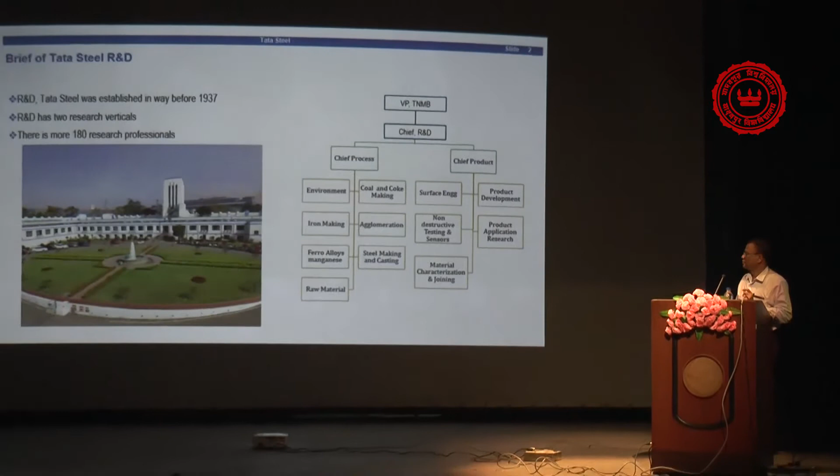R&D Tata Steel was established in 1937. Right now we have 180 research professionals, and it has two verticals in terms of process and product. Both verticals report to the R&D chief, who reports to the Vice President of Technology and New Materials Business. In the process vertical there are research groups for coal and coke, agglomeration, steel making, iron making, ferroalloys and raw materials.

Another research group is environment and energy, which I head myself. In the product vertical, there is surface engineering, which covers coatings, corrosion, finished product development, non-destructive product applications and material characterization. These are the R&D verticals.

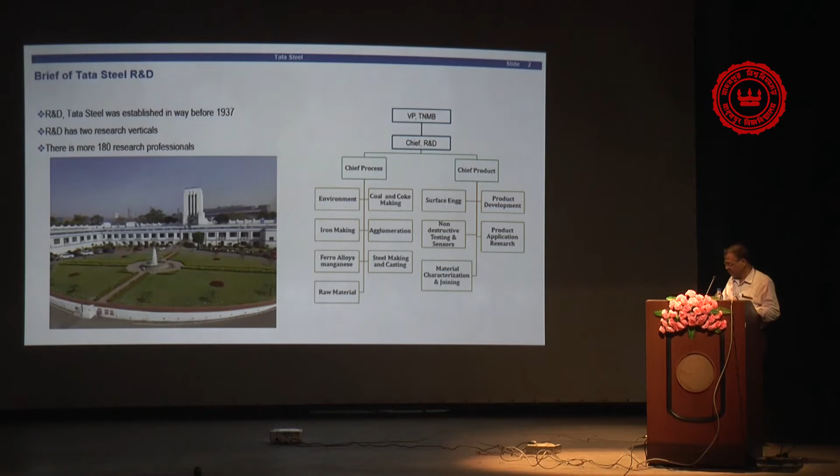Now, for any industry, sustainability completely depends on a concept called the circular economy. This circular economy is definitely applicable to the steel industry, because steel industry is one of the most energy intensive industries. It requires around 7 to 9 gigacalorie per ton of crude steel in terms of energy.

In terms of water consumption, it may be 3.5 to 4 meter cube per crude ton of steel. Another factor is carbon dioxide, which is almost 1.9 to 2 ton per ton of crude steel production. So carbon dioxide is also a major part, around 9 to 10 percent of global carbon dioxide emitted comes from the steel industry.

Now, this circular economy concerns the utilization of raw materials. Steel industry should reduce the use of raw materials as one source of improvement.

Second is, once you reduce it, either reuse it in the form of steel or for a similar purpose without significantly altering its physical properties. Suppose you are not able to reuse it, then remanufacturing -- another term called remanufacturing -- so you can use the material in different forms.

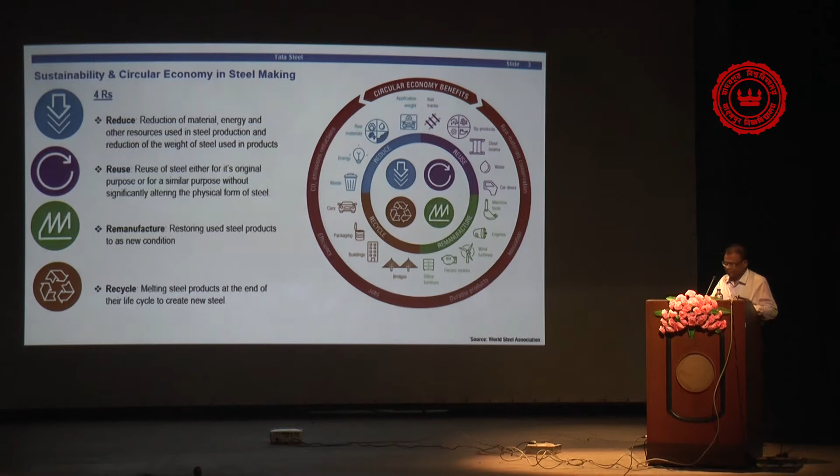Now, what are the R&D initiatives? In ArcelorMittal, POSCO and other world leaders, a lot of R&D work is going on to maintain sustainability in the coming years, even up to 2050.

Similarly, at our R&D, a lot of work is going on, either hiring technology to adopt into the system, or developing technology with the help of academic institutions. Another approach is fine-tuning existing technology so that consumption of water, energy and emissions can be reduced.

One of the first areas is effluent, meaning water. This water is also one of the most intensive resources used in the steel industry, about 3 to 5 meter cube per ton of steel.

Now, how to recycle the water? That is another challenge, because this water coming out of the steel industry is of various types. If a steel industry has an integrated coke plant or recovery coke plant, the water coming from the coke plant is highly pollutant. That water is one of the greatest challenges to reuse and recycle, because there are a lot of impurities, particularly organic compounds.

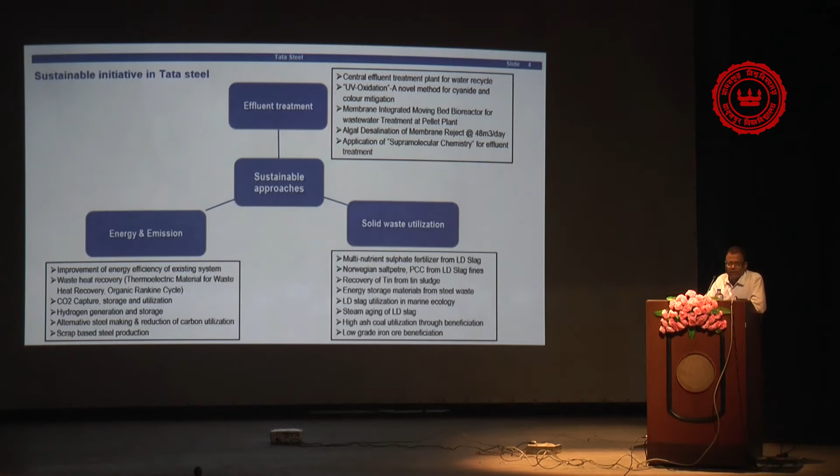Now a technology has already been developed in Japan using steam. If you use steam, the stabilization can happen within 7 days in an open area aging system, or if you have a closed aging system, it may be within 3 days. So that is just an example I have given you. That is the area we are working in. The R&D is a part of this, with different approaches. I will come to that later.

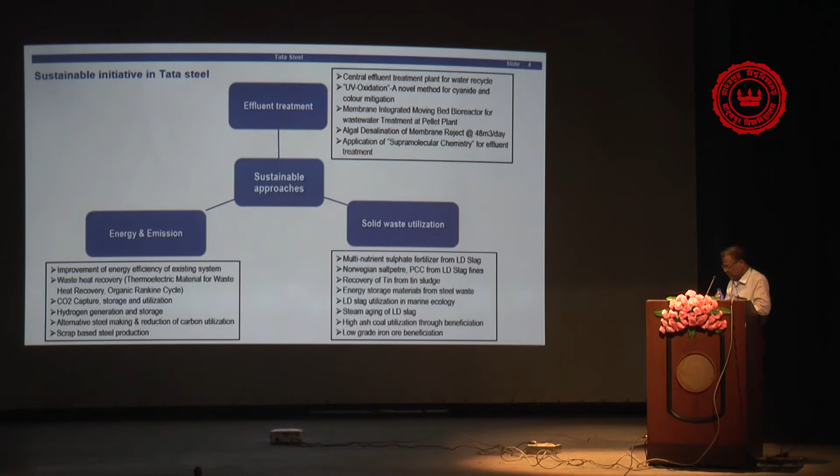So for any steel industry, these are the 3 components for stability and sustainability. And definitely in the coming days, carbon dioxide, energy and solid waste are a threat for the steel industry. Still now, the world benchmark is 2.3 cubic meters per ton of crude steel. These are the big players; right now Tata Steel is at around 3.5 cubic meters. So this is the world picture along with the Indian steel makers, JSW and SAIL also.

Now, this is the R&D approach in water research. Almost all the steel industry is facing two problems: one is chloride, one is cyanide. For chloride removal, a very common technology is RO. It may be UF, it may be NF, but it may recover 80 to 90%. What about the 10% reject that contains a high content of chloride? The downstream process has to be addressed, otherwise you cannot address the entire problem, because the quantity is very high, minimum 200 to 400 cubic meters per hour. So the downstream process needs to be very clear.

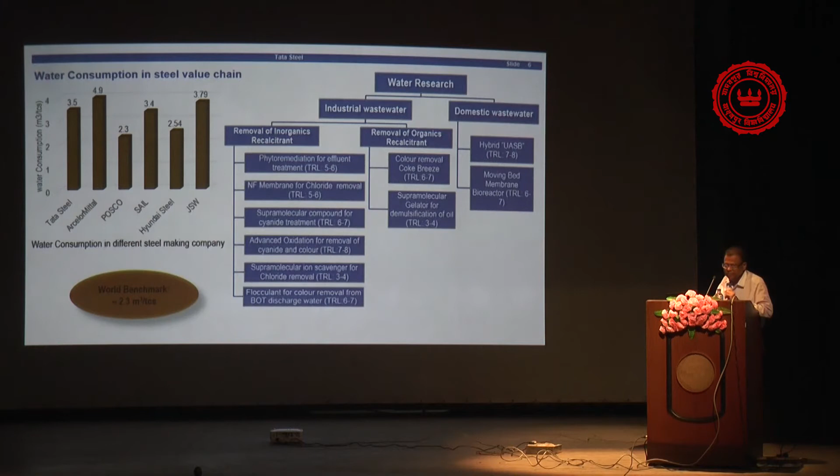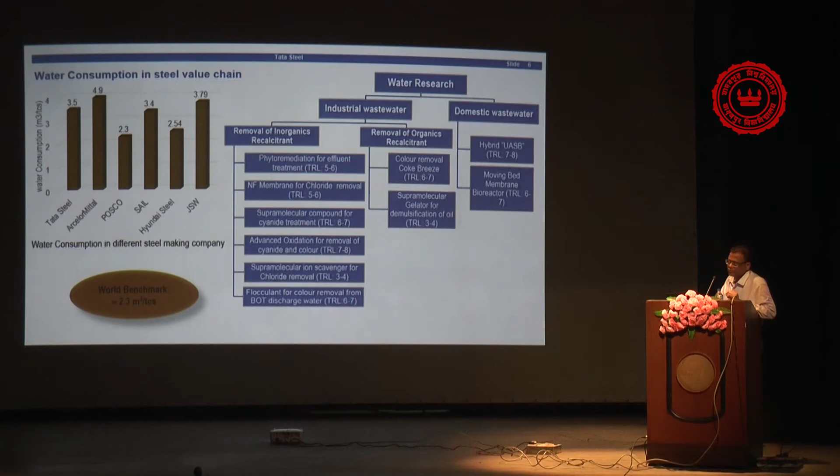So this is the scope of the area where some in the world, say POSCO and others, have also developed a very good chemical treatment using the work of one of the Nobel laureates in chemistry that people know very well, that is supramolecular chemistry. They actually introduced it. We are also working in supramolecular chemistry, on how to capture this particular cyanide species and remove it. So this is the scope for R&D approaching effluent treatment to sustain this entire industry.

Now coming back to energy and emission, these are the normal improvements in the energy efficiency of existing Tata Steel operations. These are already in the system: performance improvement of the chiller plant and cooling plant. These are in operational use. Coke rate reduction in the blast furnace is one of the areas. If you reduce the coke rate, carbon dioxide emission will definitely come down. Or you can even use low grade iron ore, where the aluminum silicate will be less, where the carbon dioxide will be less.

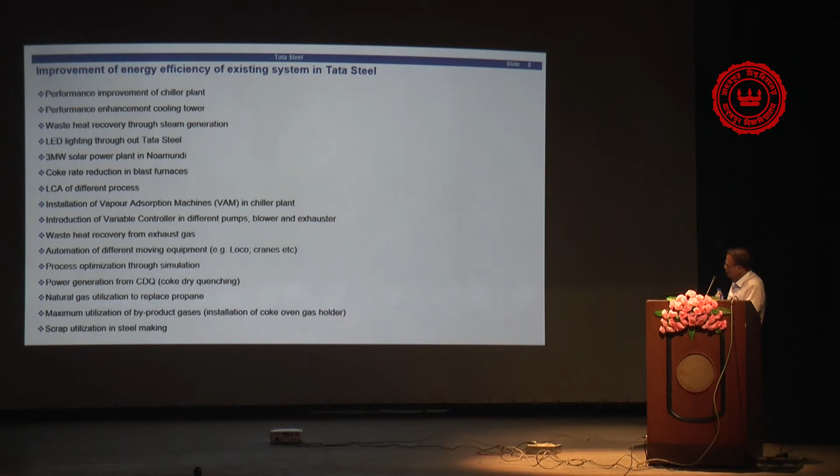Waste heat recovery from exhaust gas: the technology is already available, and we are using this type of technology. And CDQ is definitely a part of this. And maximum utilization of byproducts by using coke oven gas; these are already in the system, we are using it.

Now R&D takes part in another way. As I just explained, we have some areas, not only in Tata Steel, where the integrated steel plant has a huge amount of effluent at a temperature between 80 to 90, or 80 to 120 degrees, where an organic Rankine cycle can be used to recover this waste heat. So that is the approach.

But as I know, for this low grade delta T, we still have not found the technology. We are looking for some startup companies we can work together with. We are already working. We have a small plant of 10 kilowatts that needs to be scaled up.

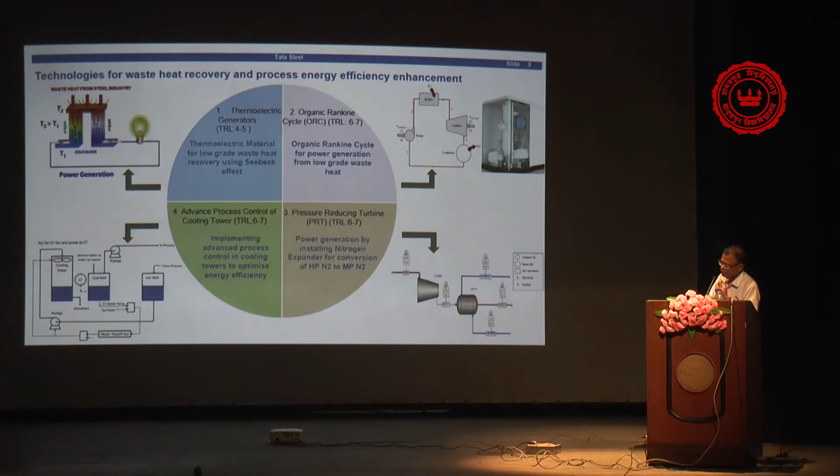Another area: we are also trying to find out where a pressure reducing turbine, PRT, can be used. We can utilize that part also. And we are also trying to find some thermoelectric generator using thermochemistry; some of the compounds, P-type and N-type compounds, we have to develop.

And this is advanced process control for the cooling system. A lot of the cooling systems are old ones, and they consume huge energy. So there is a huge chance to reduce the energy part. All this work is going on in collaboration with academia, institutions and universities, definitely. I have not explained the collaborations because in the Indian scene everybody is clear that Tata Steel has a lot of collaboration on all these subjects.

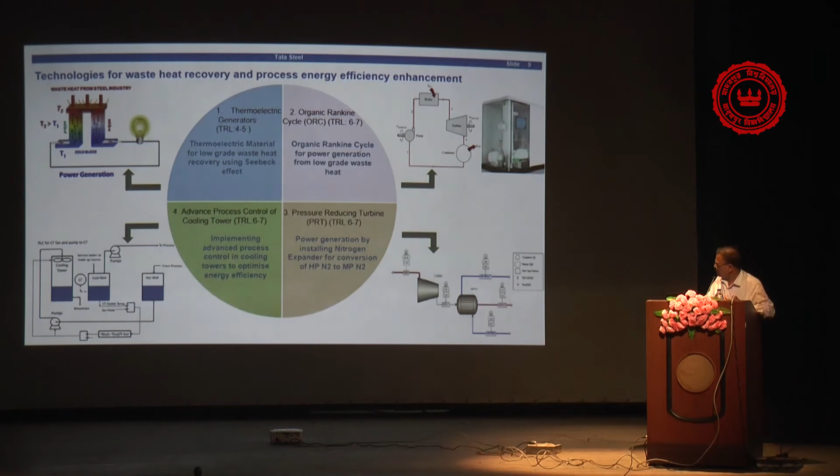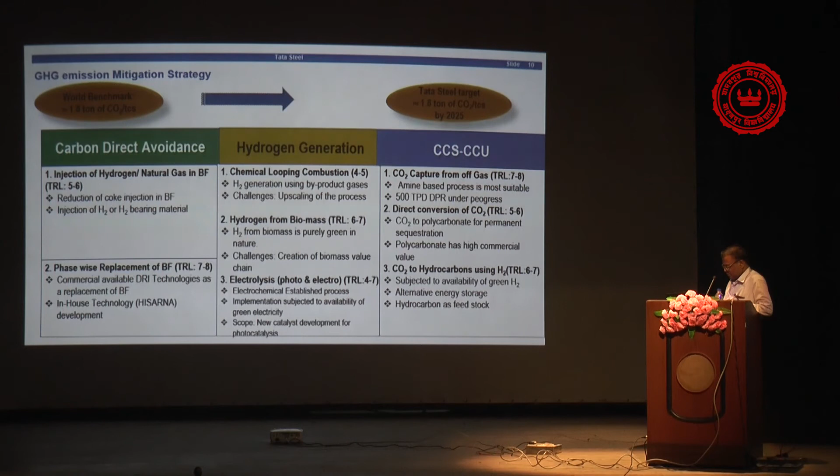Now, coming to my last, another is solid waste. Another area you have to concentrate on is solid waste being utilized for value-added products, otherwise it is a threat to the sustainability of the steel industry. Almost double solid waste is generated per ton of good steel. I am explaining only the steel industry's problem with solid waste in steel making slag, or LD slag. Because of the peculiarity of LD slag, we are facing a lot of problems.

But the good quality of LD slag is that it has very good physical strength, so it can be used as a substitute in road making, even in railway ballast. But everywhere the question is only one: you have to stabilize it before you use it. Otherwise, volume expansion is a great threat. So worldwide, a lot of research is going on for the value addition or utilization of this LD slag.

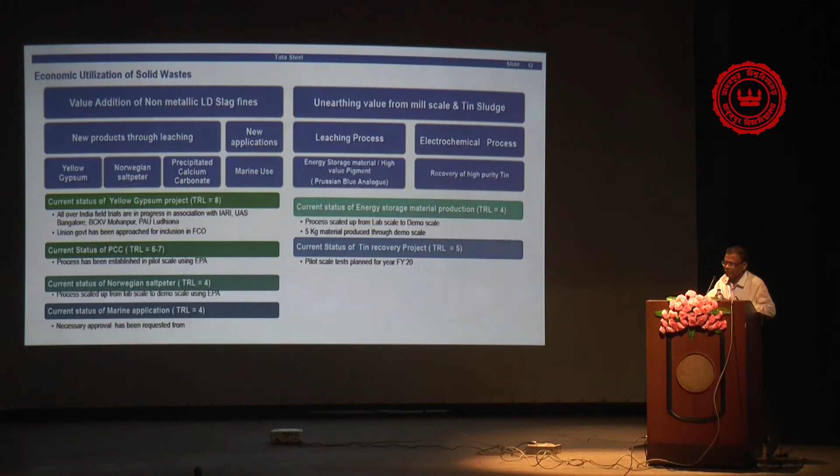So these are the R&D's approach. We are actually working for the sustainability of the industry as well as society also. And for all this work, we have huge collaboration throughout India and abroad also, altogether for the environment and energy area. I am not talking about the other areas, only the sustainability part. So thank you for this.

So thank you, Dr. Sarkar, for your outstanding presentation. Particularly, you are leading Tata Steel, and Tata Steel is leading our country in many aspects. In your presentation, we have seen different kinds of mitigation strategies to prevent and manage the different kinds of environmental hazards coming out through effluents or gaseous formation from steel industry processing. It's a combination of different branches of science and technology, as you highlighted in your lecture. Yeah. Considering chemistry, chemical engineering, electrical engineering, civil engineering, as well as mechanical engineering.

Exactly. So I think the audience and myself have benefited very much from your lecture on the application of different kinds of technologies. Time is very short, so I am taking just one or two questions from the audience.

Please. I would like to ask: in Tata Steel, the water consumption you have shown is 3.5 units. In POSCO it is 2.3, and in SAIL it is 3.4. Tata Steel and SAIL water consumption is almost the same, but POSCO's is much less. So what is the reason? Is it water quality, technology, or something else?